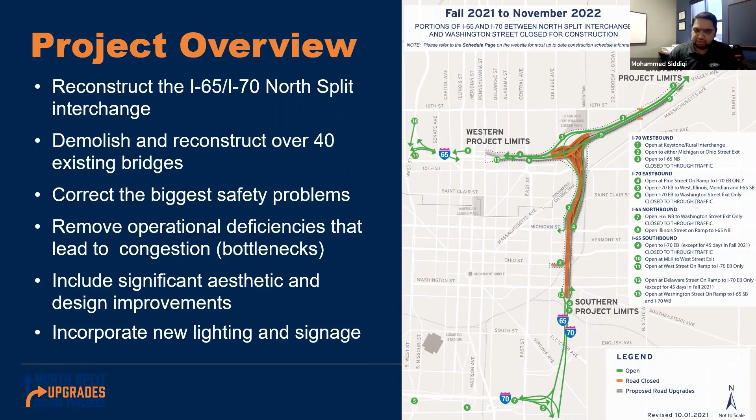As we complete the construction, some of the biggest safety problems that were existing on the current alignment would be addressed. It would remove some of the operational deficiencies and ease the flow of traffic, removing some of the bottlenecks which lead to congestion. Also, for the scope of today's meeting, this project includes significant aesthetic and design improvements, which Ken will talk about in detail. And when we're all done with the project, we'll have all new lighting and signage with current standards. Moving on to the next slide.

We began construction after finalizing of the design drawings back in November of last year. And here's some of the milestones we've achieved to date.

As you can see on your screen on the upper right-hand corner, that's the collector distributor ramp at Michigan Street with the newly paved concrete roadway, guardrail, and all the associated features with it. This was completed in early October this year and was open to traffic on the 11th of October, and it has been open since then. On the bottom right-hand corner, you can see the picture of the newly constructed bridge over St. Clair Street. The bridge is not in its final configuration because there's a lot more aesthetic features that go along with it, paint and whatnot. And Ken will be showing those in his presentation as well.

Some of the maintenance of traffic restrictions that are currently in place include truck restrictions on these exit ramps. The eastbound Ohio Street to Pine Street, which has been closed down for the demolition of the bridges over CSX Railroad and Ohio Street, will be opened up next week. The Ohio Collector Distributor ramp, which is currently closed for construction, will be opened back up once the construction is completed. As part of the commitment to the project, we had to keep open one of the two ramps, either Michigan or Ohio, open at all times. So while Michigan was closed, Ohio was open, and now that Michigan is open, Ohio is closed.

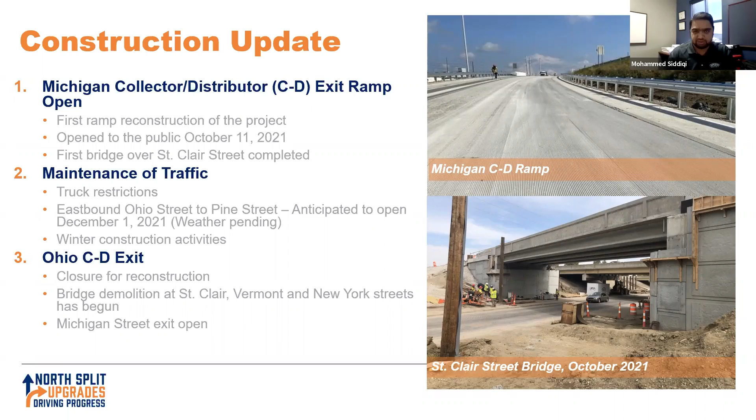Moving on to the next slide, here's all the side streets that will get new bridges on them: Alabama, Central, College, Commerce, St. Clair, Vermont, Michigan, 10th Street, Lewis Street, New York Street, Market Street, and Washington Street will all get new bridges and associated aesthetic features.

One last thing before I conclude my part of the presentation: as you can see in the picture on the screen, we're trying to utilize a lot of the existing space between the current alignment of the road to build as much as we can offline and not interrupt the flow of traffic.

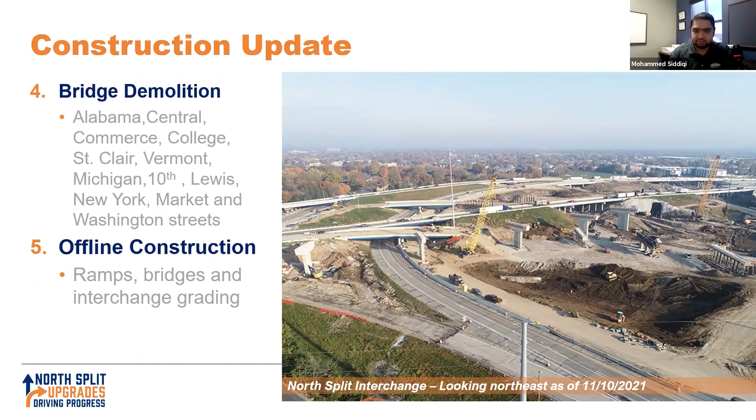The piers you see on your screen are for Structure 34, which is the longest bridge and the highlight of the project. Once completed, it'll have over 10 spans, almost 800 feet long, and it'll have associated aesthetic features as well. With that, Erica, I'll give it back over to you.

Thank you, Mohammed. I'll give a brief overview of where Superior Construction will be building the noise barriers. This map shows Wall 3W, which is on what we call the east leg of the interchange. To the west is the interchange, and to the east you see Commerce, and then on to Keystone to orient yourself.

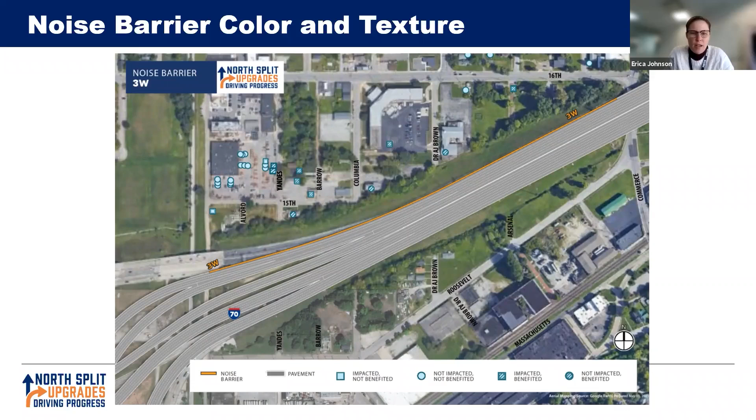As part of the color and texture requests, those properties that are highlighted that benefited from the noise barrier were provided the opportunity to give their survey results on color and texture.

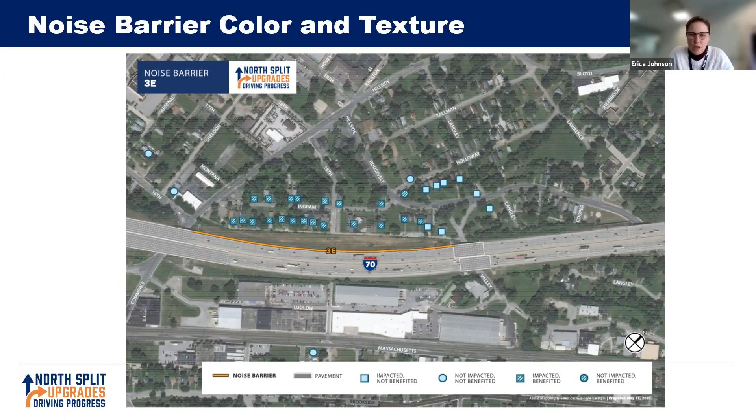Next slide, please. This is Wall 3E, from Commerce to Valley, and those are the properties that you can see were impacted and were selected for their input.

Superior Construction anticipates beginning the noise barriers in summer of 2022 and would have them finalized, substantially complete, by November of 2022.

I'm going to speak to the Aesthetic and Enhancement Implementation Plan, or AEIP, as many of you have probably heard it referred to. The AEIP shows how the aesthetic design guidelines developed during the environmental and planning processes are implemented in the final design. It further develops the aesthetic elements of the project based upon the final infrastructure design.

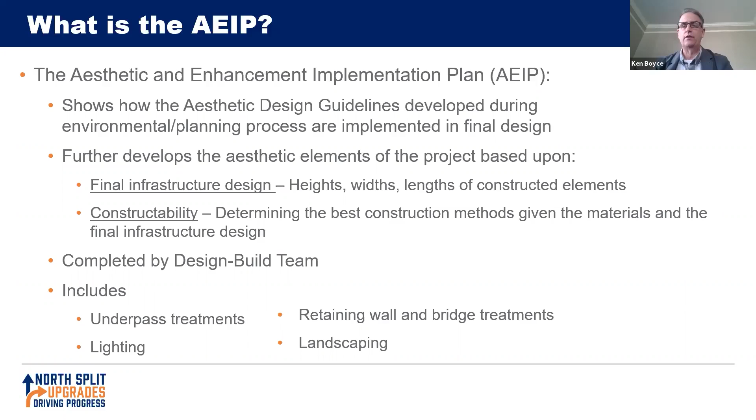The heights, widths, and lengths of the constructed elements, for instance, would be illustrated within the AEIP. We developed the guidelines based upon constructability issues, also determining the best construction methods given the materials and the final infrastructure design. The AEIP was completed by the design build team, and it includes things like underpass treatments, retaining wall and bridge treatments, plantings, and lighting.

Like the aesthetic design guidelines, the AEIP is broken into two general areas. One is infrastructure elements, including hardscape, walls, piers, lighting, underpasses, and other construction items directly associated with the bridges and roadway. The other is landscaping elements or plantings within the project area, side slopes, the interchange, and the west, east, and south legs. Construction on some infrastructure elements has begun. Those of you that are local have seen some of the infrastructure enhancements already built. Other infrastructure elements and plantings will be included in future work over the next year or so.

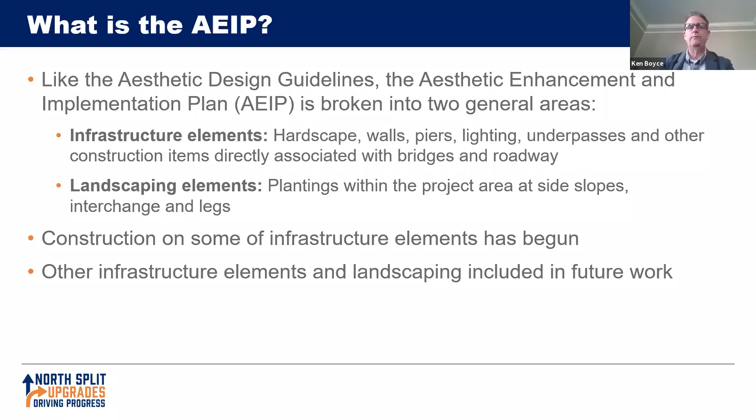So we'll talk about the AEIP infrastructure elements next.

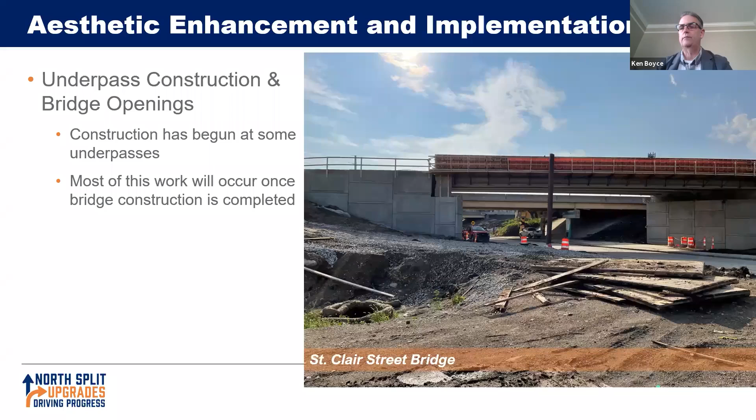Relative to underpass construction and bridge openings, construction has begun at some underpasses. Most of the work will occur once the bridges are completed. You can see an initial image of the St. Clair Street Bridge partially constructed; many of the enhancements are yet to come.

The aesthetic design guidelines developed a set of underpass treatments that the various bidders were to follow, and the Superior team has done that. They addressed things like a number of bridges requiring monuments at all four corners of the bridge. You can see in this image, as part of the design guidelines, street names incorporated on the barrier on top, fairly wide pedestrian sidewalks, and other pedestrian facilities.

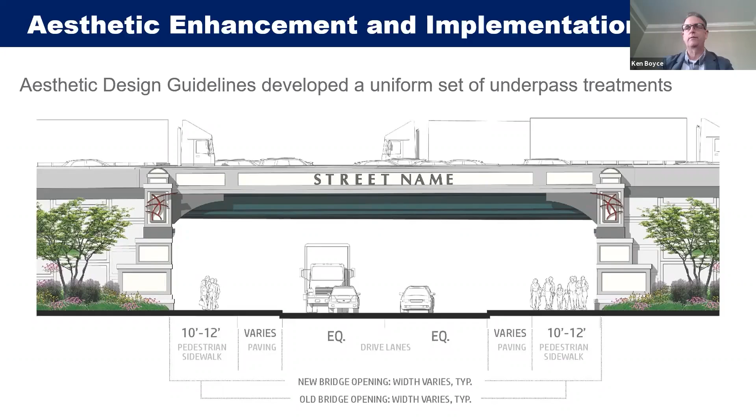A major gateway bridge application will occur at 10th Street. This major gateway designation was done within the design guidelines, and the AEIP sought to apply those guidelines to this specific structure. You can see the span is fairly wide on 10th Street, with major monuments at all four corners. Otherwise, the character of the 10th Street Bridge is very consistent with the image we saw from the design guidelines.

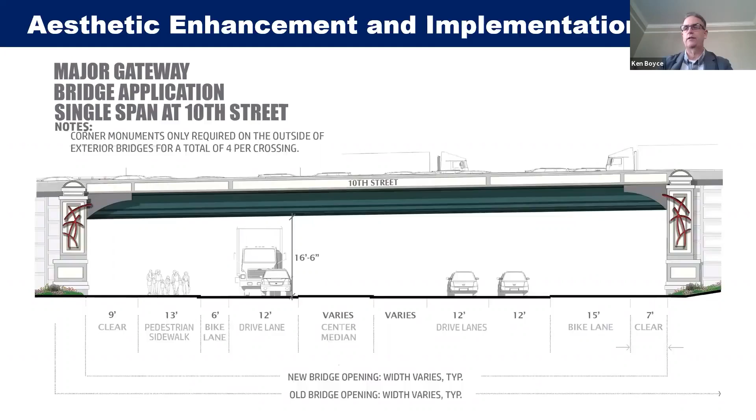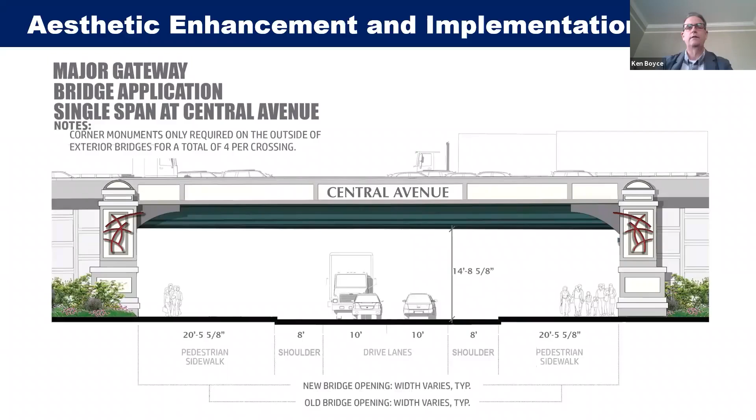The Central Avenue Bridge has a much shorter span, but again it's a major gateway element or bridge opening, and it has monuments at all four corners of that bridge also.

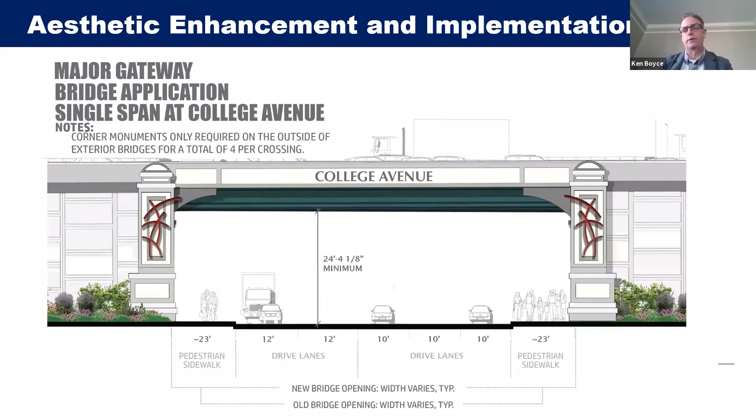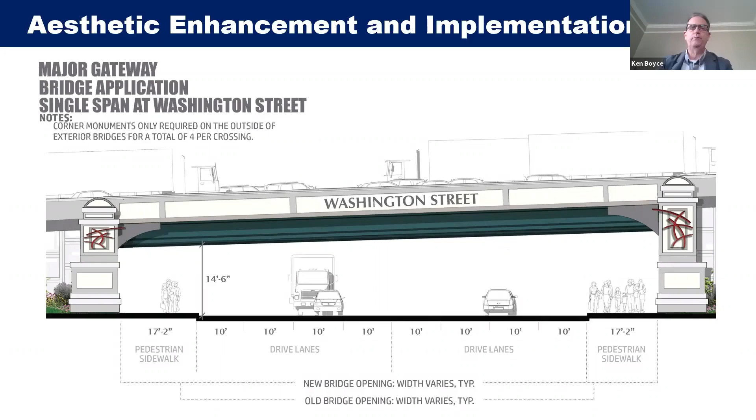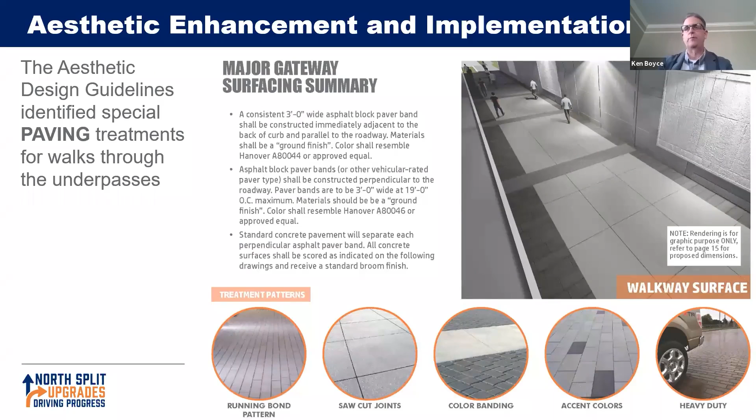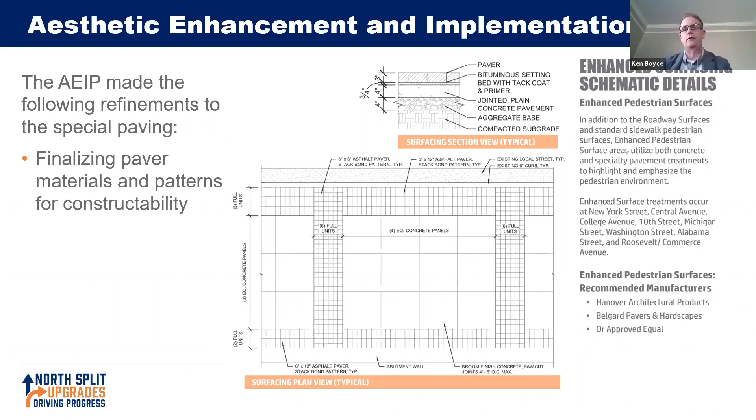The design guidelines identified special paving treatments for walks that pass underneath the bridges, with a number of particulars specified within the design guidelines, which the AEIP then sought to implement. The AEIP made some refinements to the specialized paving, finalizing the materials and patterns, all reviewed based upon constructability issues.

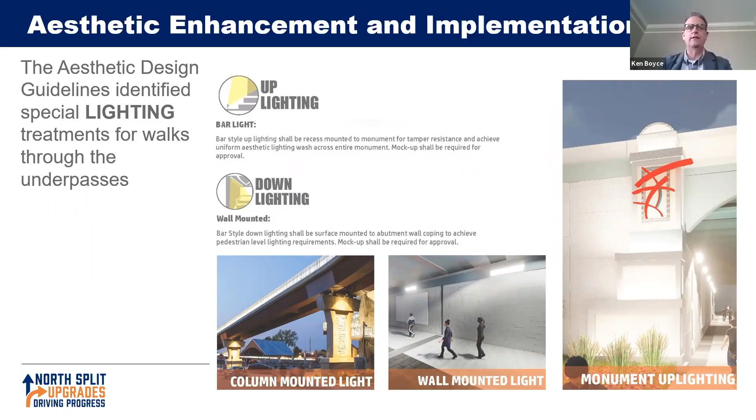Going from the design guideline graphics to the AEIP, part of that process included picking the actual fixtures that were consistent with the character identified within the design guidelines.

We have some uplights, floodlights for things like the monument lighting. And then we have downlighting on the walls underneath the bridges, so that we get a well-lit pedestrian zone under the bridges, making it feel more comfortable for pedestrians after dark.

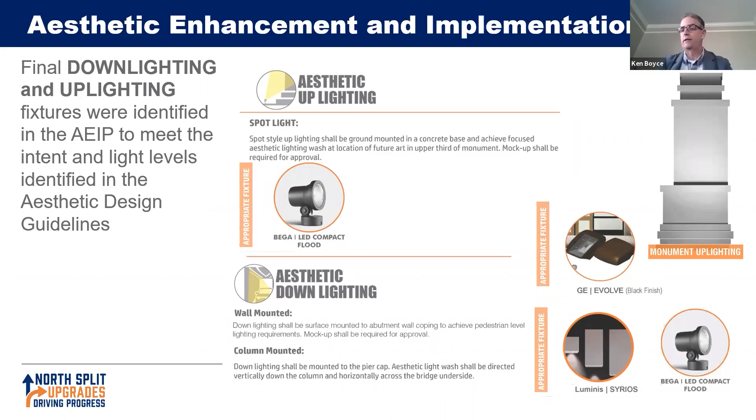The general pier aesthetics were defined in the aesthetic design guidelines. Mohammed spoke a bit to the piers on the large bridge structure that's partially constructed. Within the design guidelines, a general character was established that included some reveals and some battered faces on a portion of the piers.

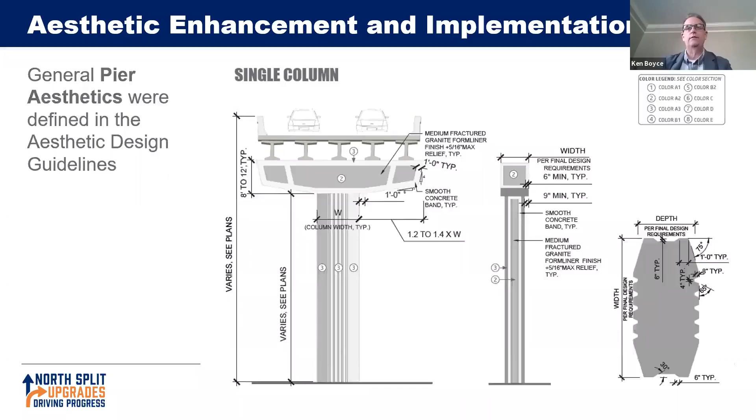The aesthetic enhancement and implementation plan took that character, generally established in the design guidelines, and applied it to the actual structures engineered for installation. You can see a very similar character to the piers. The reveals have been kept, and the end treatments on the piers are very similar, battered faces and so forth.

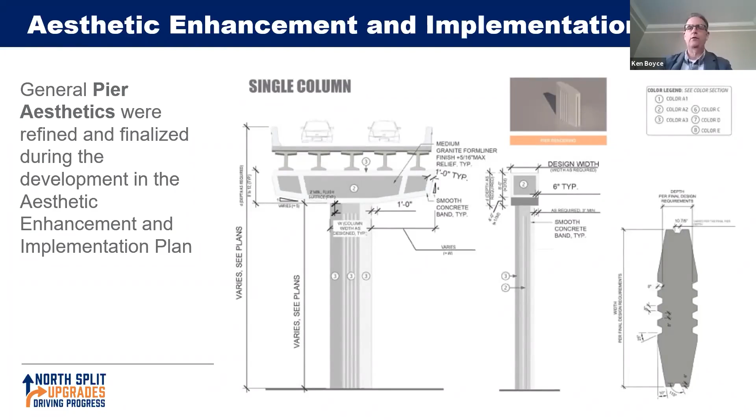As part of the process, Superior Construction has built full-size mock-ups of the stems on the piers. You can see the reveals here in a portion of that pier. These mock-ups were built to verify shape and dimension of the piers, and to test and verify finishes, colors, and textures on the piers. A very nice step in the process.

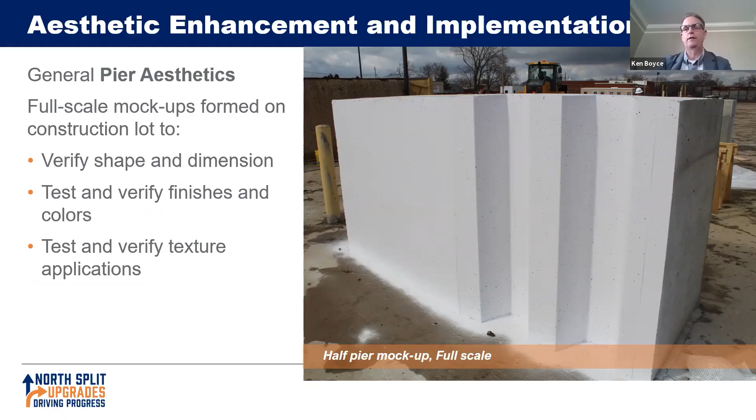This is a close-up view of one of the piers that has been built, very similar to the character established within the design guidelines. The reveals do a nice job of creating interest with the shadow play, and the battered faces are quite elegant.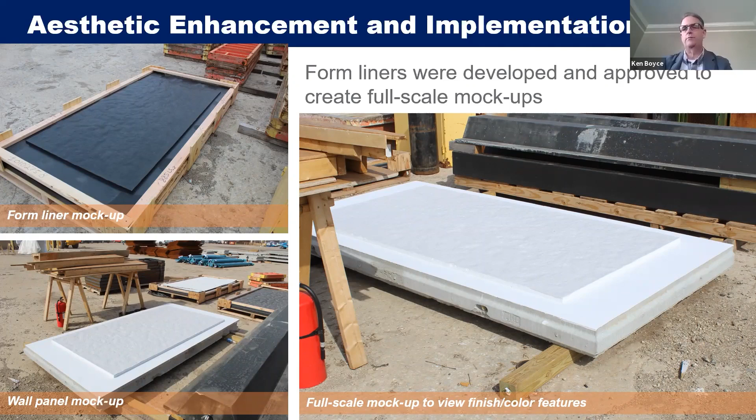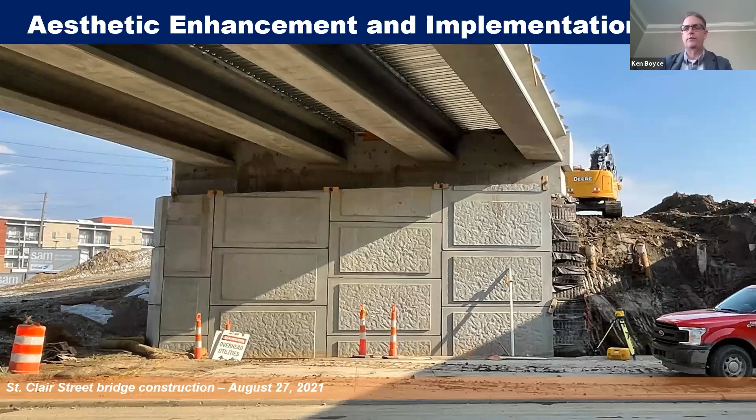This is a close-up image of the abutment at the St. Clair Street Bridge that's been built. You can see a portion of the aesthetic enhancements are in place, with lots more of the MSE wall to come.

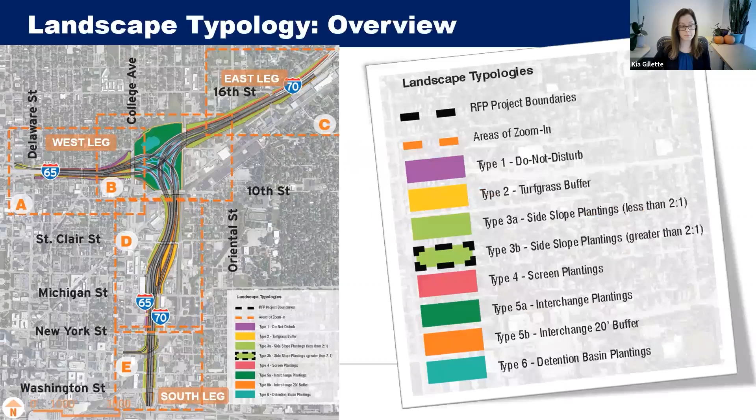Thank you. Next slide, please. As part of the design guideline development process, there were a series of what they referred to as landscape typologies. The purple areas on the image designate existing plant material deemed worthy of keeping — those are do-not-disturb areas. The yellow is a turf grass buffer area intended for places where we need a mowable lawn for safety reasons, similar to what you might find in some people's yards.

Type 3 typologies are the side slope plantings — essentially the slopes present throughout much of the interstate project area, planted with shade trees, ornamental trees, shrubs, and meadows including native grasses and wildflowers. The red areas are screen plantings specific to the residential side adjacent to the sound barriers, intended to screen the barriers a bit more than they otherwise would be.

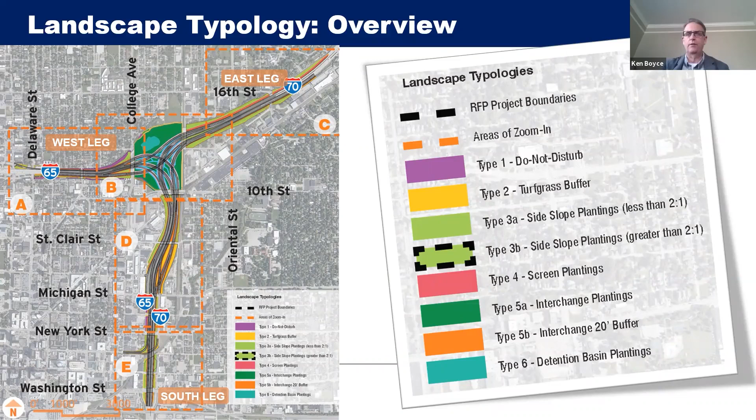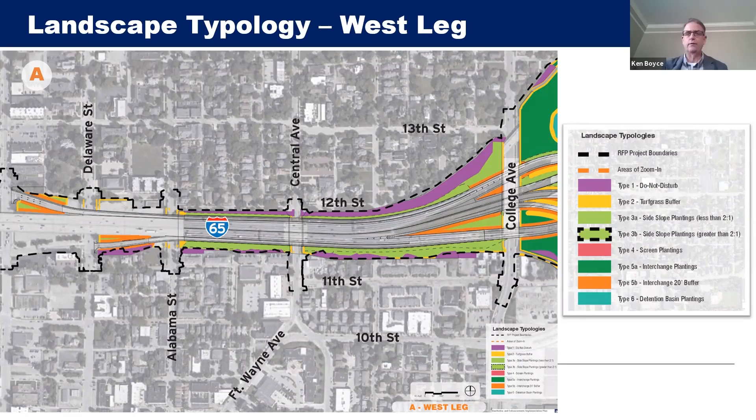So the design guidelines developed these areas and designations of different typologies for the various legs and interchange areas, and the EEIP and planting plans sought to develop that character. Next slide, please. We've illustrated for today's purposes a portion of the west leg planting plans.

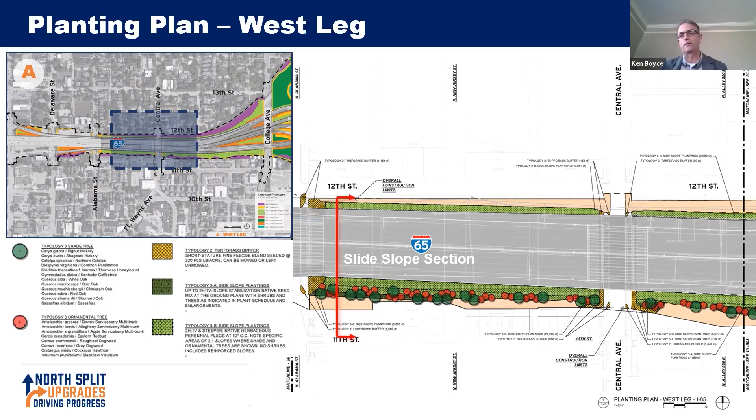We just took the planting plans and added some color for illustration purposes. On the south side of the interstate, the larger dark green circles are canopy trees, and the smaller reddish colored trees are ornamental trees. The lime green color is typology 3 plantings, in this case native grasses and wildflowers, on both sides. The tan color is the turf grass buffer areas.

Next slide, please. We've drawn a section through this particular area, adjacent to the Old North Side and St. Joseph historic districts, intended to give a three-dimensional representation of what those plantings will actually look like. I'll start on the right side of the image — this is the right-of-way line on the far right side, which is typical to most of these sections you'll see.

There's an existing vegetated area there that is going to be kept, so a do not disturb area. Adjacent to it, we have a type 3B typology of wildflowers and native grasses. On the other side of the section, where it's a right-of-way line, we have existing plant material in that zone, an area of plantings that will be preserved as a do not disturb area, and then some typology 3B plantings of native grasses and wildflowers adjacent to the travel lanes.

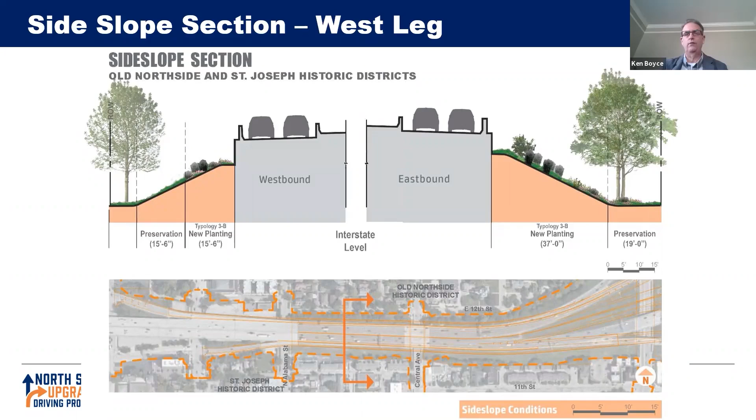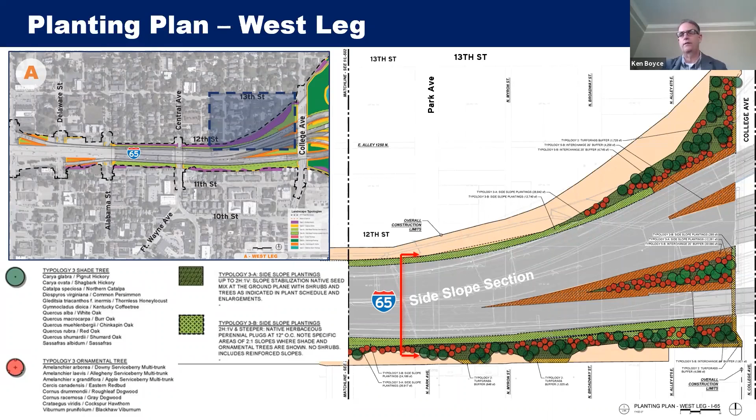Next slide, please. Again, here we have drawn a section to illustrate what that's going to look like in a three-dimensional sort of way. On the right side, you can see where the section is drawn here. It's looking east on the south side of the interstate. On the right side, the right-of-way line, and then we have a do not disturb area there of plantings, and then type 3 plantings between the do not disturb area and the eastbound travel lanes. That's composed of canopy trees, ornamental trees, shrubs, native grasses, and wildflowers.

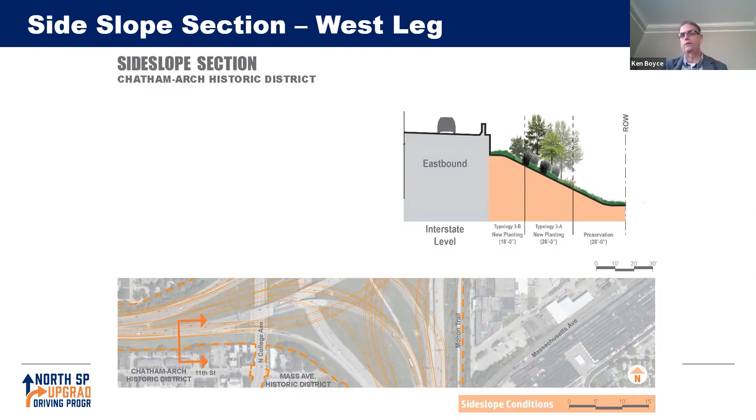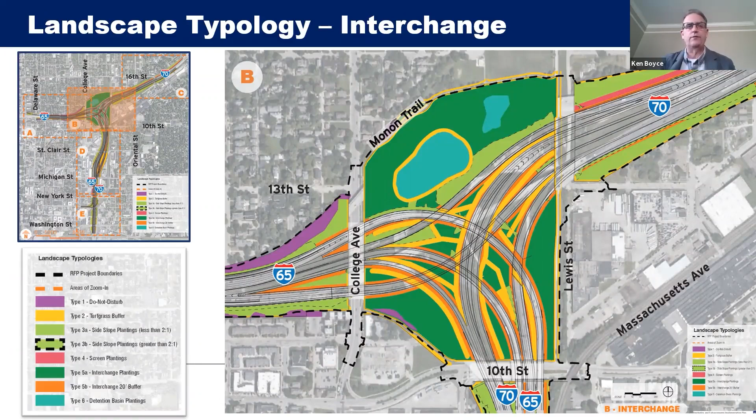Next slide, please. This is the interchange itself, design guideline document, and sets out the general intent of the application of the landscape typologies.

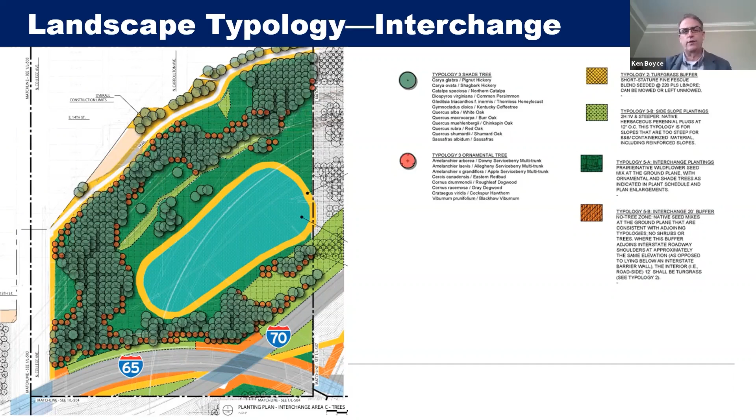Next slide, please. This is the northwest portion of the interchange in the area of the detention basin. You can see the manner in which the canopy trees and ornamental trees are applied. The dark green is a typology 5 landscape, an open area with native grasses and wildflowers. And then the yellow is the mowable lawn, surrounding the detention basin for the purposes of maintenance access, allowing INDOT to get in there and maintain that pond edge. The rust color again is the type 5 typology that has restrictions for tree plantings for motorist safety.

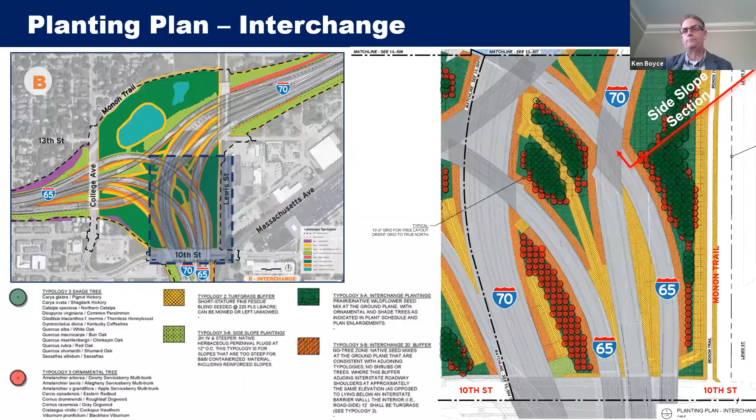Next slide, please. And then we're going to speak a little bit about the area in what would be the southeast portion of the interchange. Similar graphics here on the right side. You can see how the tree plantings are represented. Again, mowable lawns in areas that are required for maintenance access, and then a lot of native grasses and wildflowers on the ground plane.

Next slide, please. So this is a section cut through the side slope in the area of the Monon Trail on the east side of the interchange. Starting on the right side, we start at the right of way line, we come across the Monon Trail itself. We have turf grass on either side of it. And then the 5A plantings that are associated with that area: canopy trees, ornamental trees, native grasses and wildflowers. The native grasses and wildflowers will just continue up to the interstate travel lanes. So on the ground plane, you'll see a pretty continuous planting of meadow grasses and forbs, and then in specific areas planted over the top of that with canopy trees and ornamental trees. Next slide, please.

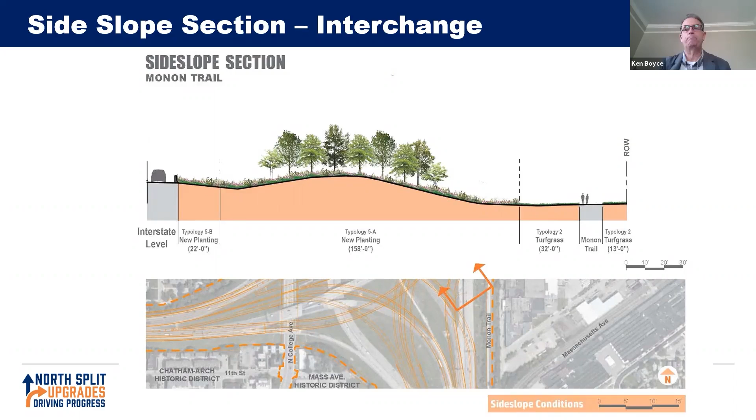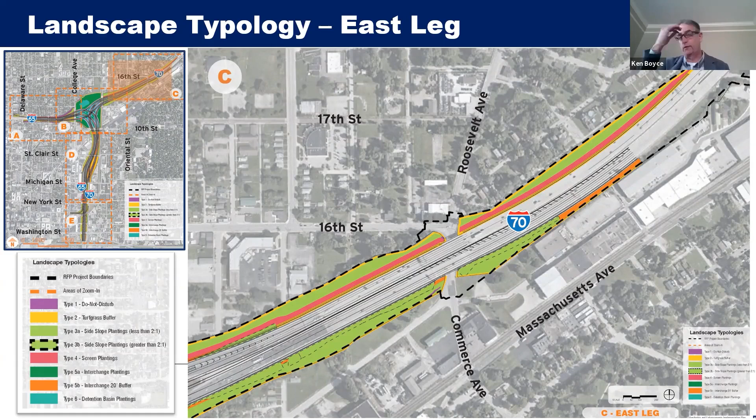So the east leg, we're on the east side of the interchange now with this image. Again, the design guidelines laid out many of the areas, designated certain kinds of plantings, and unique to this area would be the rust colored or reddish color associated with the sound wall screening. So that's something unique to the east leg. Next slide, please.

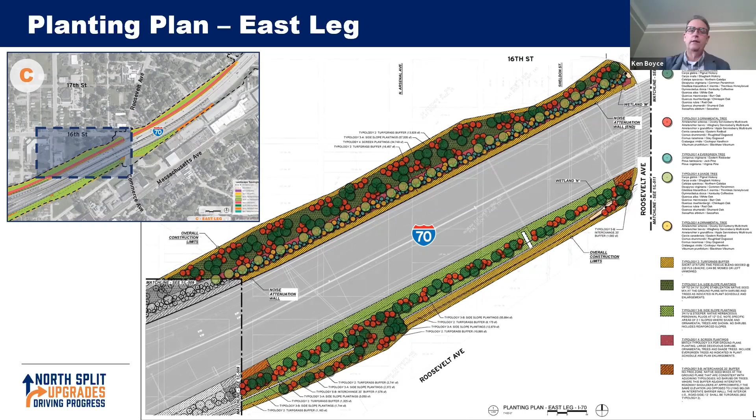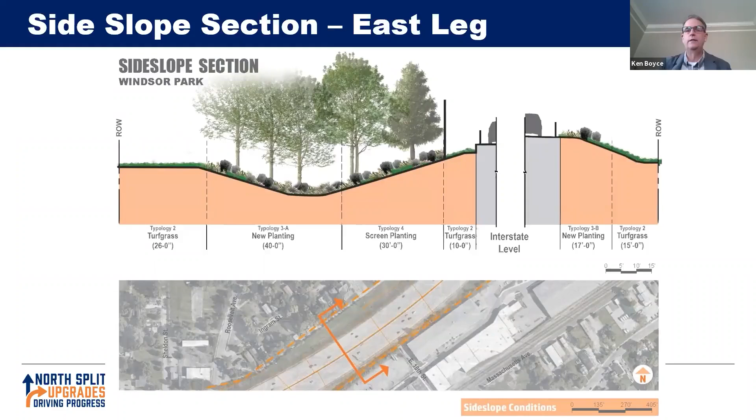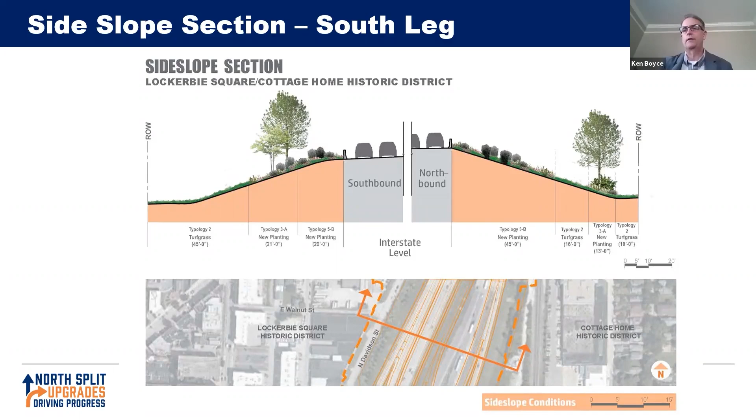On the right side, turf grass typology, and then a typology 3A, which is the full gamut of canopy trees, ornamental trees, shrubs, native grasses, and wildflowers. And then a section of type 2 typology, and then a section of 3B, which is the native grasses and wildflowers. Next slide, please.

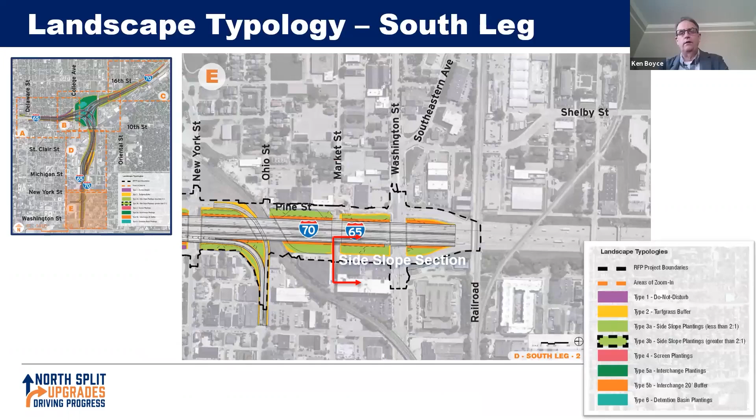So we're further south on the south leg, down the very south end of the project, design guideline direction that was established. Next slide, please.

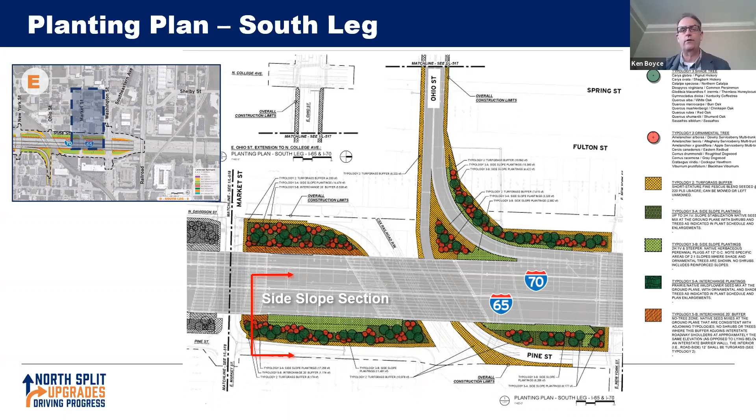And then an illustration in that general area, just to give you a bit of orientation. So this is the interstate off ramp onto Ohio Street, and then Ohio Street going underneath the bridge and transitioning to Pine Street. Again, you can see how the canopy trees and ornamental trees are deployed with turf grass buffers and native grasses and wildflowers. Next slide, please.

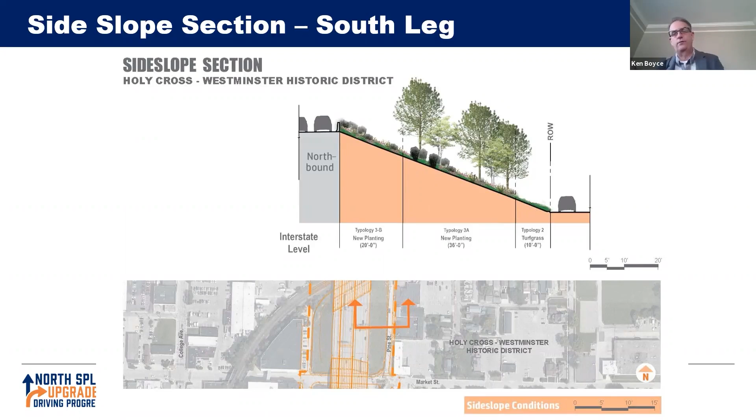The section through that side slope, starting on the right side, this is again in the vicinity of the Holy Cross Westminster Historic District. The right-of-way line on the right side, turf grass buffer, and then new plantings, type 3A plantings, which is canopy trees, ornamental trees, shrubs, native grasses and wildflowers, and it transitions into a 3B, which is native grasses and wildflowers. Next slide, please.